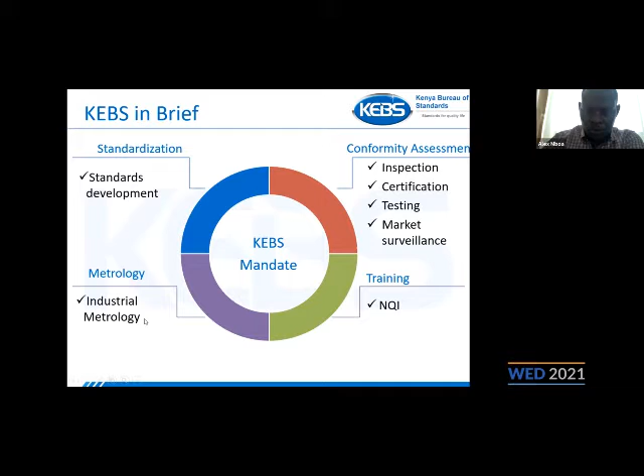So some of you, especially those dealing with measurement equipment, are aware of the importance of having your equipment calibrated. So we offer those services as well.

What is a standard? Generally, you can define a standard as a specification or guideline that outlines the safety or performance requirements for products, processes, or services.

It's normally developed and encompasses the following principles: the principle of openness, whereby participation in the process of developing a standard is open to all stakeholders interested in the aspect being standardized. We also have the principle of transparency, in that we inform stakeholders of the need and the standards we are developing. So the process is open, and in case you want information regarding development of a particular standard, you can get that information.

The standards development process is also based on consensus. Consensus means that when stakeholders come together, as KEBS we normally give them a platform to discuss the technical details of a standard. We prefer that there is consensus, meaning agreement. We build consensus within the committee, not necessarily unanimity, but consensus can be defined as where there is no sustained technical objection to a particular element or clause of the standard.

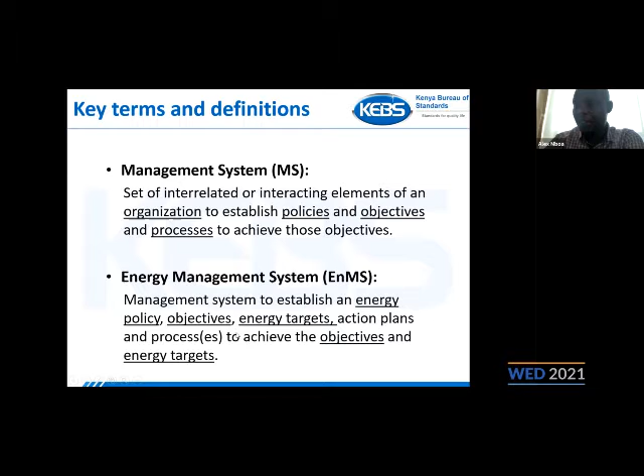The development of ISO 50001, the document was developed by ISO, the International Organization for Standardization. ISO standards are also based on consensus, and they are normally developed through technical committees, or in some cases where there is no technical committee existing, they have project committees.

ISO TC 301, Energy Management and Energy Savings, is the TC responsible for developing and maintaining ISO 50001. Currently this is the 2nd edition, which replaced the first edition, which was the 2011 edition.

And the 2nd edition adopts what we call a high-level structure, which is recommended for all the management standards. So the rationale for having a similar structure for all management system standards is that it helps organizations in having an integrated management system.

For example, if you already have an environmental management system in place, you can integrate it with an energy management system, or you can integrate an ENMS with a QMS already, if the structure is the same.

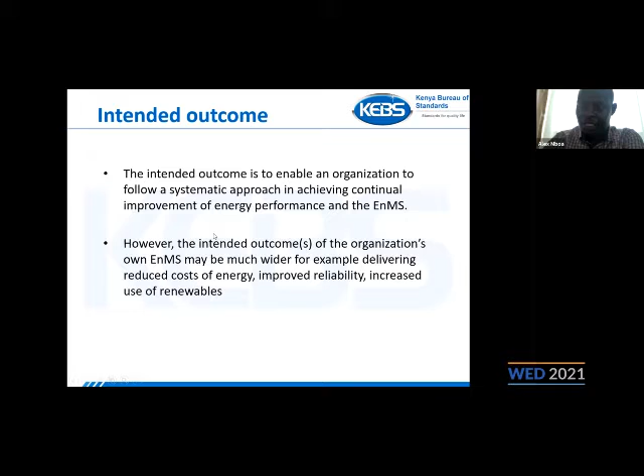Sometimes the organization can have a wider outcome than the one given above. For example, your outcome might not be energy performance improvement, or you might be concerned about energy costs, improved reliability, and increased use of renewables within your facility. So those are some of the other intended outcomes of implementing an ISO 50001 based energy management system.

Why implement an energy management system? So the first thing that comes to mind is, I think for those who have been conducting energy audits with the organization, there is what we call institutional memory.

Sometimes when you are doing energy management in an ad hoc manner, you find that the energy champion maybe leaves the organization, moves to another place. So if you didn't have a system in place, you'll have a problem because all the institutional memory is gone, and you need to start again from a clean slate.

If you had an energy management system in place, you can survive a key member of your energy team leaving your organization because the systems are already in place. All that remains is training the new employee on how to go about doing things.

The standards allow you to have a systematic approach to energy management, whereby the key aspect is that you are able to improve your energy performance in terms of consumption and related use. You can also reduce your energy cost, meet your climate change goals, have improved reliability, and increase the use of renewable energy in your premises.

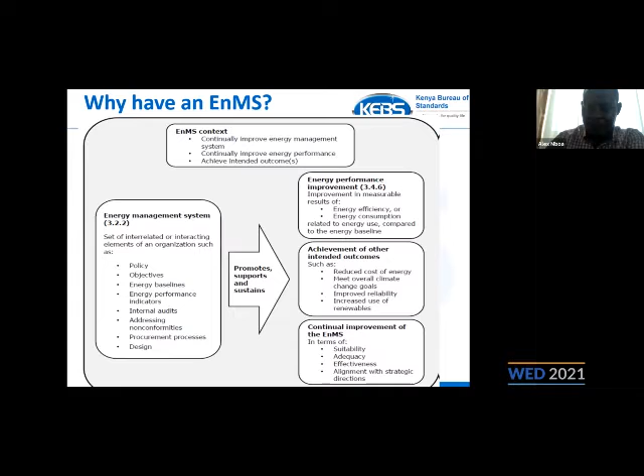The scope of the standard, ISO 50001, is actually applicable to all types of organization. How is that so? Because it allows you, the organization, to set your own targets and objectives, and then put in place measures. So the system you put in place has to be commensurate to the size and the resources that you have. The key thing is that you have to show continuous improvement in your energy performance and also the performance of the energy management system.

The other aspect is that the document can be used as a standalone document. It can also be integrated with other management systems. For example, if you already have an environmental management system in place, then it's easier for you to integrate the document within the other management system standards as well.

The rationale here is that you already have people who understand internal audit processes and the management standards way of doing things. So when you bring in the energy management system as well, it becomes easier, and the process of implementation becomes a little bit shorter.

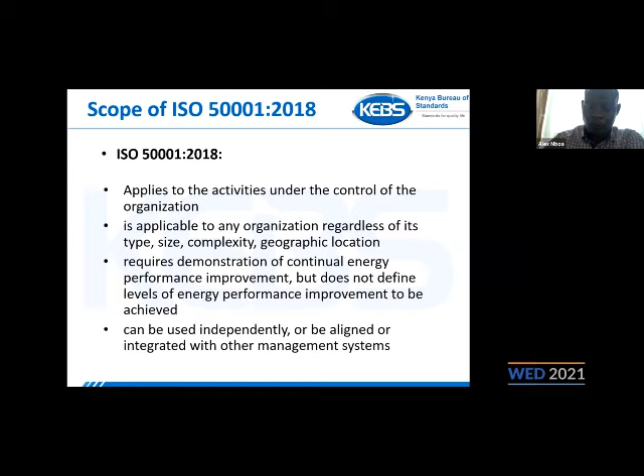The structure of the document is that ISO 50001 is based on Annex SL. Don't mind about that abbreviation - the document is actually called Annex SL, and it gives guidance on developing management system standards, providing a high-level structure for the management system standards, whereby the clauses are the same.

For example, you have a 10-clause high-level structure for each management system, even though there might be some differences here and there, which I will highlight in the next slide, between ISO 50001 and the other clauses. The rationale here is that it makes it easier to work with more than one management system if they all follow the same structure and common text in some areas as applicable.

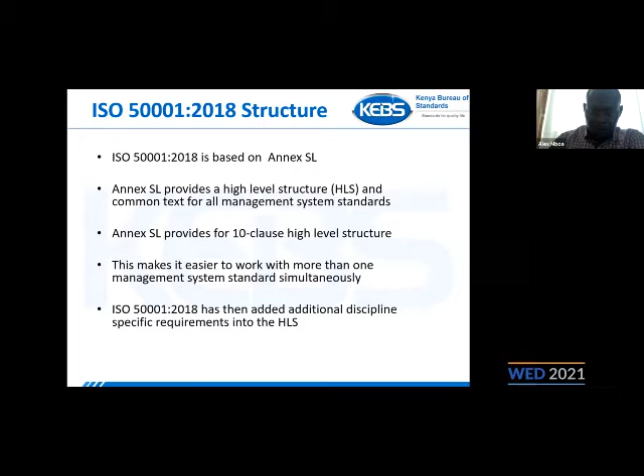The structure of ISO 50001 is highlighted here below in this diagram. Clause 4 talks about the context of the organization. The rationale here is that you're supposed to understand your organization before you start implementing an energy management system. You're supposed to understand the context of your organization, and understand the needs and expectations of your interested parties.

For example, one of the interested parties might be the regulator - what does the regulator require from your organization? Your investors might be part of the interested parties. Your employees are also part of your interested parties. So you understand their needs and also their expectations.

Once you do that, you can determine the scope of your energy management system. For example, if you have an organization with multiple facilities, does the scope of the energy management system cover all the facilities or just one facility? That's the scope - you also define the boundaries of the management system. Once you've done this, all of it is done with an understanding that there is top management support.

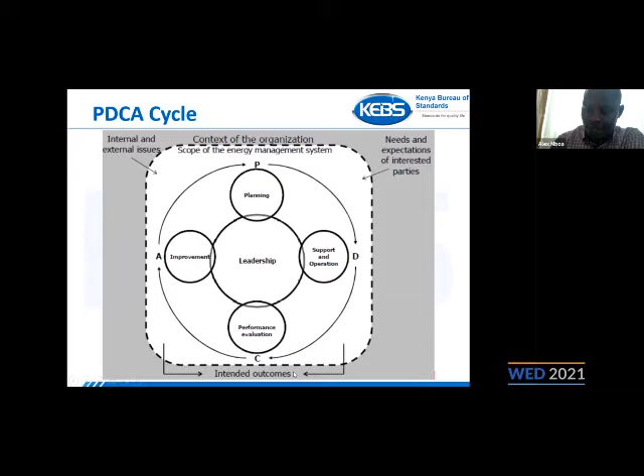So under the planning, we have to understand the context of the organization. You establish an energy policy and an energy management team. You have to address what we call the risks and opportunities. You conduct an energy review, identify significant energy uses, establish energy performance indicators, energy baselines, objectives, targets, and also develop the action plans to achieve those targets and objectives.

Under the do, this is where you implement your action plans, operation and maintenance controls, and communication. You ensure that you have developed enough competence. You also consider energy performance in design and the procurement aspect.

Under the check, that's where you're monitoring. You monitor, measure, analyze, audit, and also conduct management reviews. Act is when you are supposed to address the non-conformities and continuously improve your energy performance and the EnMS.

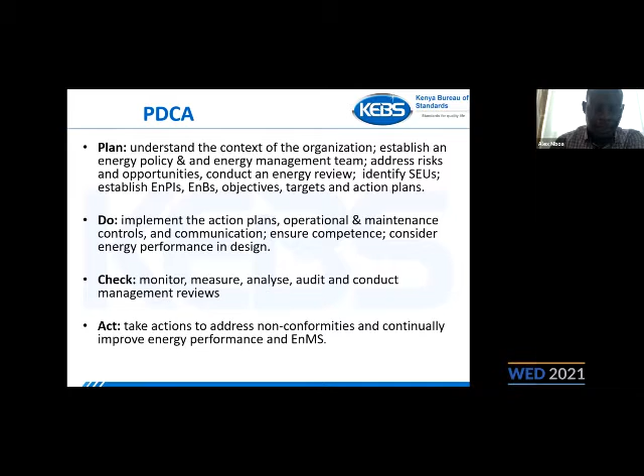The energy planning process envisioned under ISO 50001 can be viewed in two levels. First, you have the strategic view of the energy planning, then there is also the tactical view of the energy planning.

So the planning inputs under the strategic level of planning are the internal and external issues. Once you've understood the context of the organization, those are the inputs you'll have in your strategic planning. You also have the needs and expectations of interested parties. What you're expected to do under this stage is identify the risks and opportunities for your organization. Then the outputs for this exercise are normally the actions to address the risks and the opportunities.

Under tactical planning of energy, the planning input is current energy types, past and current energy uses, and past and current energy consumption. Then you conduct the planning aspect, where you conduct the energy review based on the energy consumption, then you determine your SEUs.

So you have to have a criteria for determining your significant energy uses. You might say those are the processes or equipment that consume, for example, 80% of the energy consumption in the facility. When defining the SEUs, they don't necessarily have to be the equipment or processes that consume the most energy. They can also be those processes or equipment that give you more opportunities for saving or improving your energy performance.

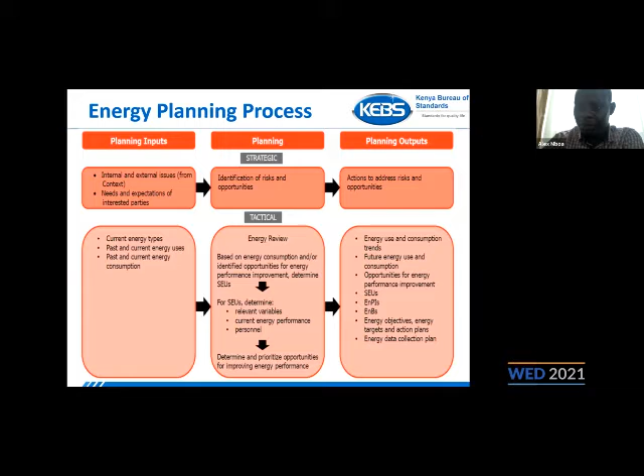The next section, we'll briefly talk about the implementation process of ISO 50001. The process can be viewed in three stages. The first stage is actually determining where we are. Then, once you have assessed where you are, you implement and operate. And then finally, you manage and improve.

So under this first stage, you are supposed to establish top management interest in establishing the energy management system. Then you also understand the requirements of the standard, legal requirements, and the expectations of interested parties and such.

Then you conduct the baseline review, develop a Gantt chart, do resource mobilization for the resources required, then approve and communicate the implementation plan that you have developed. Once you have developed that implementation plan, you are supposed to implement, monitor the project, and give the project enough resources.

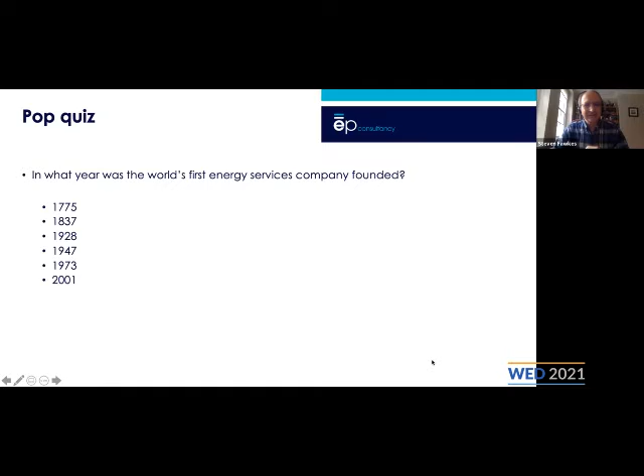The first ESCO was created in 1775 by James Watt, who of course invented a more efficient steam engine - he didn't invent the steam engine, he just made it more efficient. He and his business partner, Matthew Boulton, created an energy service company in England in 1775, and they provided these efficient steam engines to pump water out of mines.

And the way they got paid was they took a share of the savings in coal. So it just shows, you know, there's very few new ideas. And when people talk about ESCOs, their first one was in 1775.

So just 200 years after that, ESCOs started to come to the fore and be talked about, obviously in 1973, and then again in 1979, we had the oil crisis, and that really started talking about energy conservation, as we called it then. And from that point on, in the 70s and 80s, there was a growth of the ESCO industry.

Here in the UK, for instance, had BP and Shell create energy service companies. And so when you see these big oil companies suddenly saying, oh, we're into green and renewables, they tend to go through waves - in the 70s and 80s, and then they divested later on.

In the 90s, you had a lot of utilities entering the market, particularly in the US and Europe. And you also had USAID, which was extremely good at promoting the ESCO idea around the world, as well as energy performance contracts. And so in nearly all parts of the world, there are people who got trained by USAID originally and then created ESCOs, and many of those ESCOs are still small, and most of them have never really achieved the potential that they could.

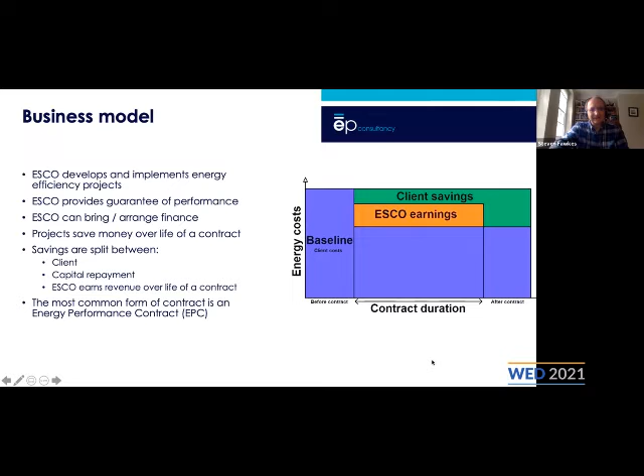And what's important to understand and remember, putting China on one side for the moment, where there are a lot of single purpose industrially focused ESCOs, 90% of the revenue in European and US ESCOs are in the public sector. And one of the phrases, pieces of jargon that you hear a lot talking of ESCOs, particularly in the US context, is the MUSH market, which is municipalities, universities, schools, and hospitals. But most ESCO activity is in the MUSH market.

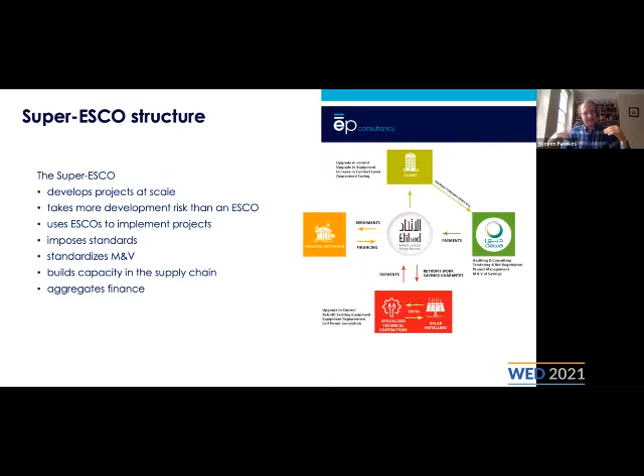This is one of the real issues when we talk about energy efficiency financing - the projects are very small compared to the amount of capital that institutional capital likes to deploy. Energy efficiency projects in the few millions to the tens of millions would be a very big energy efficiency project, whereas an investor or a fund needs to invest hundreds of millions. So this super ESCO can act as an aggregator of projects and arrange large quantities of finance.

And I suppose the first and most famous example is Super Etihad in the UAE, which, as I always say, it's rather surprising that the UAE is teaching us about energy efficiency when you look at their energy consumption, but they really have pioneered this model with the help of Regional Bank and others, and are doing some really, really good work.

They're working with clients who have buildings, so they're contracting to carry out this kind of work across whole portfolios of buildings. They're taking much more development risk, and they're really driving standards and building capacity in the supply chain - doing many of the things that address the problems with conventional ESCOs. So again, really worth reading up on what Etihad is doing and has done.

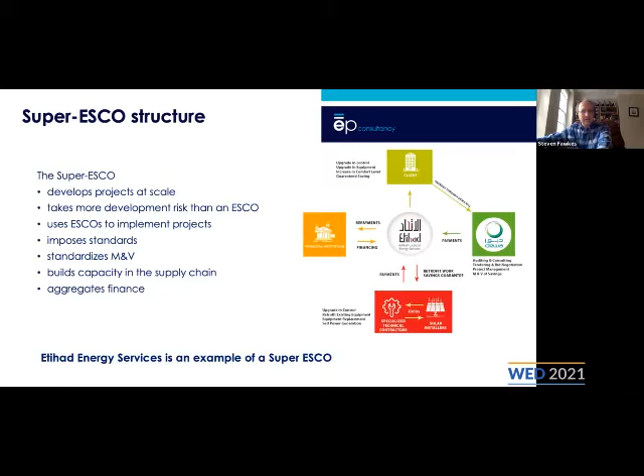So there are varieties of Super ESCOs, a bit like service contracts - there's not just one type. You have the Etihad model, which is a Super ESCO that has to be owned by DEWA, the Electricity and Water Authority. It uses performance contracts, despite all the problems I've mentioned about EPCs. It uses local ESCOs and really focuses on big portfolios of buildings.

The newer one, now up and running, is in Saudi Arabia, modeled quite a lot on the Etihad one. It was set up with World Bank assistance and is owned by the Public Investment Fund. Again, it's using EPCs and local ESCOs, but it's really focused on the government estate, which in Saudi Arabia is large. It's always hard to get much information about what's going on there, but it is up and running and implementing projects.

The two best examples, or the first examples, of Super ESCOs are from the UAE and Saudi Arabia - countries not formally known for their energy efficiency capability.

Another variety of Super ESCO is EESL in India. We have a partnership with EESL here, but EESL operates in a completely different way to Etihad and Tarshid. It aggregates demand, so it works with local governments and industrial sectors, collecting all the demand for projects and putting them together to implement them. It does not use energy performance contracts, it doesn't even use measurement and verification, but it is very good at implementing projects at scale, and it's publicly owned.

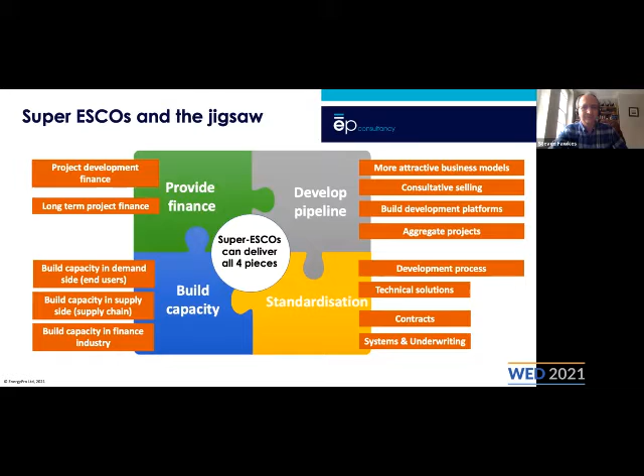If we go back to my 5 examples of super ESCOs, Etihad, Tarshid, EESL, SPL OSER, and CEF, as we call it, they've all got different models, different ownership structures. They operate in different sectors and have different financial sources, but they all deliver these 4 pieces of the jigsaw in different ways. And I think that's really important when you're thinking about, either as a policymaker or as a company, how do you increase the flow of investment into energy efficiency?

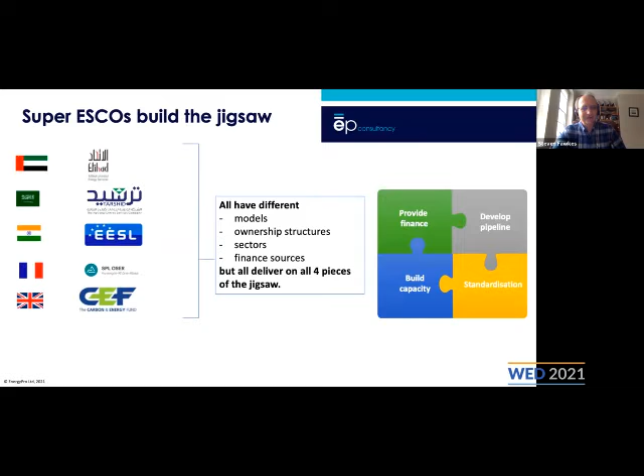So it would be remiss of me not to mention ESCO in a box. I know that some people know about ESCO in a box, this is a thing that we developed. I said earlier that one of the problems of conventional ESCOs is they cannot possibly work with SMEs. The contracts are too complicated, the projects are too small, and the UK government had a competition to come up with new business models for how to address that problem.

And we came up with ESCO in a box in partnership with Oxford Low Carbon Hub and Oxford Brookes, funded by BEIS, and with Chris Mabori at Innovators and Trevor from EnSo Impact and funding from GIZ, we're now deploying it in Kenya.

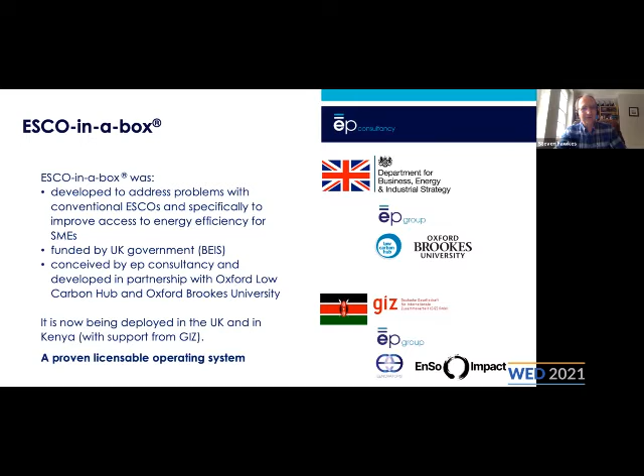So this is an alternative model, originally designed for SMEs, and it's a licensable operating system, which is why we call it ESCO in a box. If you buy the license, you get the box, and everything you need is in the box. The box contains a startup package, a marketing package, standard contracts, partner support, an operation package, and links to sources of finance. I'm sure if you want to know more, we'll be happy to provide information, or Chris Mabori can talk to you about it as well. So that's ESCO in a box.

And it really is a way, what we're finding here in the UK, and I think elsewhere in the world, it's the way of building energy efficiency capacity, which we need, but it's also more and more being seen as an economic development tool in some regions, where people recognize the kind of economic development pathway has to include ramping up investment into energy efficiency.

Where do ESCOs fit into everything? As I said earlier, what we're trying to do is increase the flow of investment into energy efficiency. That is the central problem we're all working on. There's this massive pool of potential projects - you can go into any building, any industry, and find projects. I almost guarantee anybody on this call can do that. But what we don't have is turning that potential into real projects that get invested in, whether by the company or by somebody else. It's just the amount of investment that we care about.

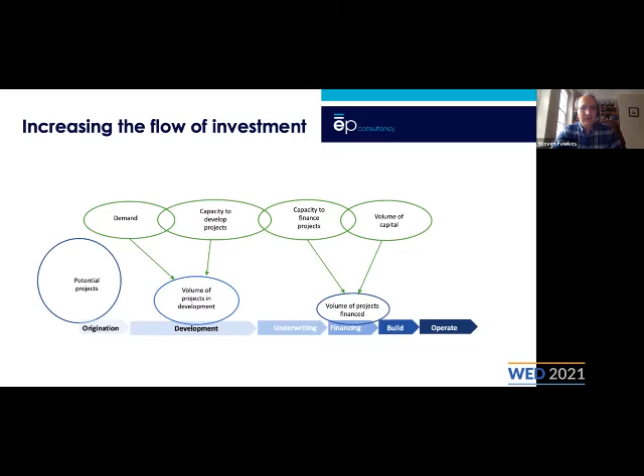I think ESCOs are primarily around the capacity to develop projects. They can influence demand because they can go out and sell. They can influence the capacity to finance because they're interacting with finance. So they're sort of bridging that development with a bit of finance and a bit of demand building.

I think if we think about super ESCOs, they can become much more involved in building demand, particularly when they're selling to large portfolios and taking on more of this early stage development risk. And they can get very much involved in building capacity to finance projects because they're interacting with institutional investors and presenting opportunities to deploy large amounts of capital rather than small amounts. So they can help build that capacity.

And then on top of that, you get this idea of dedicated financial sources or financing instruments - things like dedicated funds or dedicated credit lines, or other sources of money saying we definitely want to invest in energy efficiency. That can influence demand, because if people know the money is there, they will go out and develop projects. It can help build capacity to develop projects, capacity to finance projects, and build the volume of capital. So I think that kind of spreads - ESCOs cover one part of this problem, super ESCOs a bit more, and then financial sources cover more of the problem. It's really important to link those together when we're designing policies and programs to increase investment into energy efficiency.

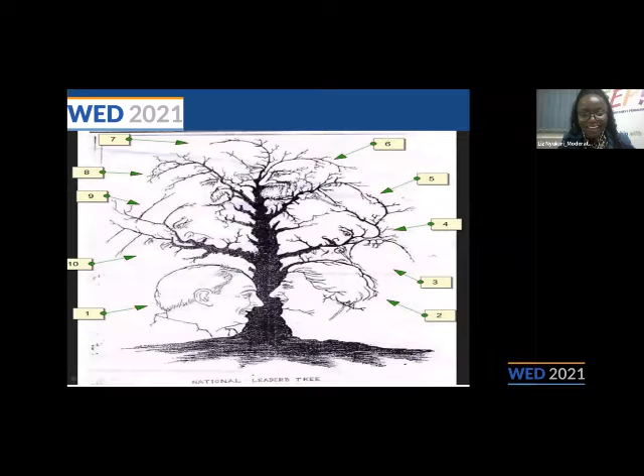It's excellent for those with 8 and 9. Thank you for that challenge. Thank you, Emily, and thank you to the audience for participating in this one.

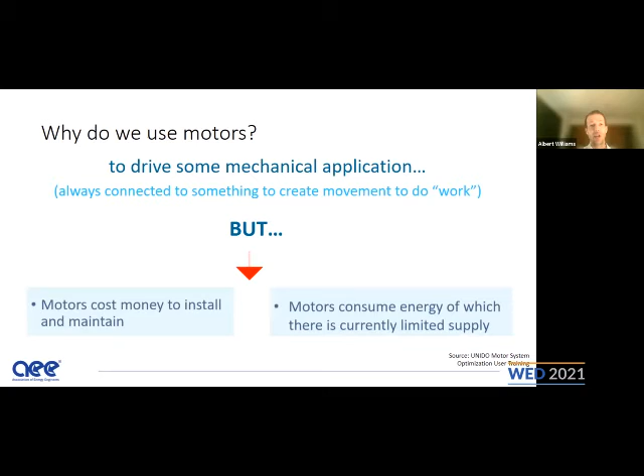So let's start at the basics. Why do we use motors? A motor on its own cannot exist - if I have a motor and switch it on, nothing is going to happen. I have to connect a load to this motor, like a pump, a fan, a compressor, or a conveyor, for me to get some work out of my system. So motors cost money to install and to maintain - that's quite expensive, and I'll show you the life cycle cost of motors just now, how expensive it is to operate a motor over a 10 or 20 year life cycle. So we really have to look at how we are consuming energy in motor systems.

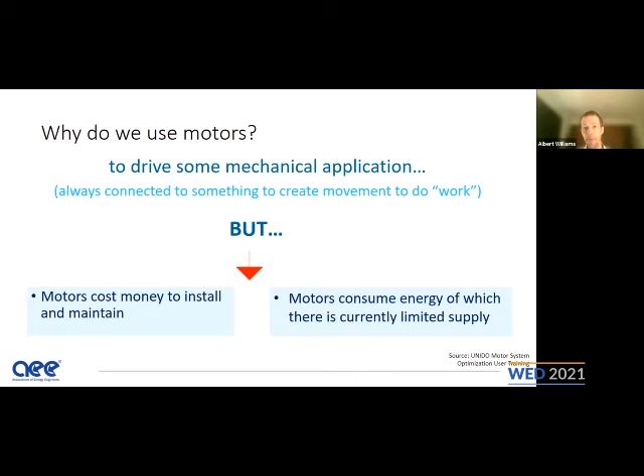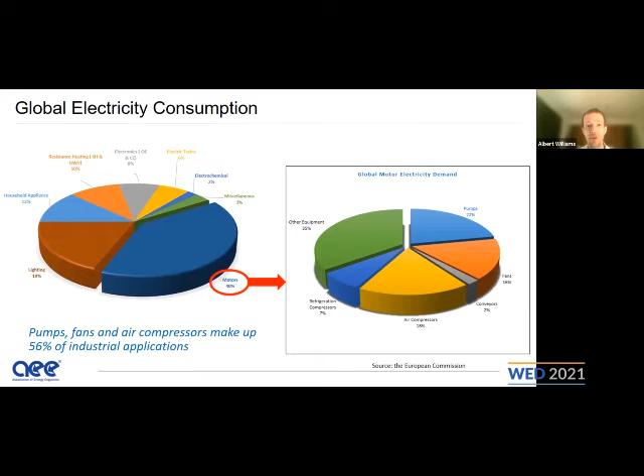Just giving you a little bit of a global perspective, motors consume a lot of energy. If you look at industry alone, two-thirds, or 67%, of all industrial energy goes to motors. But if you look at global electricity consumption, 46% of that goes to driving motors. If you take that 46% and break it down into the loads we are driving - pumps, fans, compressors, conveyors - we're sitting with about 22% for pumps and 18% for compressors. That's the breakdown of the applications the motor is driving.

I did some research on the IEA website. They publish, every now and then, some new information - a very nice source. The IEA said our total energy supply globally is 166,000 terawatt hours.

You can go through those numbers. The global electricity consumption is 24,000, and industry sits at 10,000 terawatt hours, about 40-42% of that. Motors consume two-thirds of that, so we're sitting with 7,000 terawatt hours. Compressors consume 18%, fans 18%, and pumps consume 22%.

Looking at the average electricity tariff, we have 150 billion euros per year going to pumps. That's a lot of money being used to drive pumps, compressors, fans, and conveyors.

The IEA also did a study, and they said if you go into the average industrial facility, you can save 26%. So in any industry, 26% of energy is available to be saved at an economically attractive rate of return. That represents 39 billion euros per year.

So there's a lot of money available, there's a lot of work. This last week in Egypt, we've been traveling throughout the country, going to different facilities, and I can assure you there's lots of energy being wasted. Even companies that are ISO certified with a very clean record - if you look below the carpet, you see a lot of dust and wastage everywhere. So there's plenty of work for us as energy efficiency engineers to do. The work will never dry up.

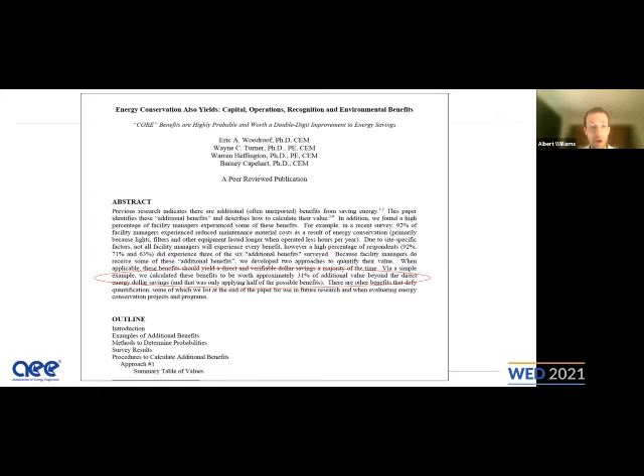There's another paper that says you can save 31% in addition to the energy savings. So it's not only about energy savings, but we improve productivity and reduce maintenance. Some of these soft topics also have a 31% additional saving beyond the pure energy savings. So I hope you agree that energy efficiency is really attractive from a financial standpoint. Some of the previous speakers have also talked about the financial aspects.

This is just an example of a compressor versus a normal vehicle that you purchase. If you look at the 5-year life cycle cost, where does your money go for 5 years? For a compressor, 88% of your life cycle cost goes to the electricity cost of that compressor. The purchase price is relatively small. Compare that to a vehicle, where the energy cost is actually quite low compared to the purchase price.

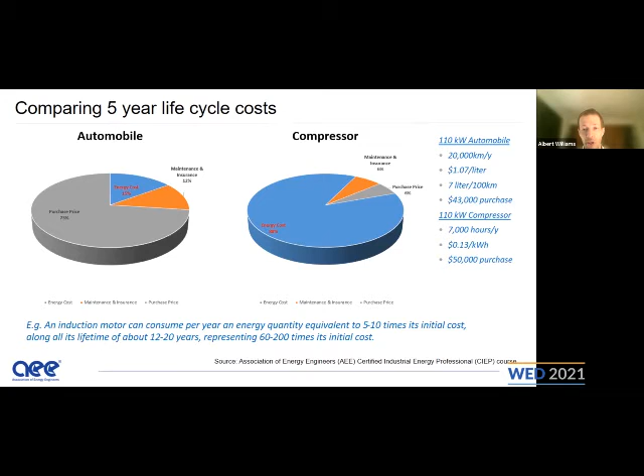Look at this statement at the bottom, which is very interesting: an induction motor can consume per year an energy quantity equivalent to 5 to 10 times its initial cost, and along its lifetime of 12 to 20 years, that represents 60 to 200 times its initial cost. So ladies and gentlemen, you can agree with me that it's worth spending a little bit more on your motor, as the energy cost will be 60 to 200 times the original procurement cost.

When we look at motors and motor systems, we take the systems approach. We're not only looking at the motor or the component - as I've said, the motor cannot exist on its own. We have to look at the drive, the pump, and the entire system.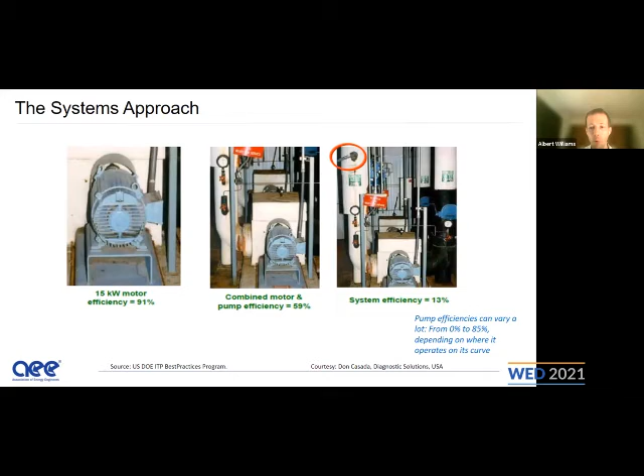So if we only look at motors and only think about improving the motor to a higher efficiency class, we are actually missing most of the savings. That's why we take the systems approach - we look at the pipes, the valves, the control mechanisms, how the water, air, or steam is being used, rather than only looking at the motor.

So what have I essentially done here? I have gotten the same output, but the input power has been massively reduced. So what I've created here is a virtual power station.

Now you can spend a lot of millions or billions of South African rands that we have been doing to build some power stations, or you can create these virtual power stations. So these virtual power stations, we are creating energy to have energy security in the country, and we can now improve the economy and use the energy elsewhere to grow the economy.

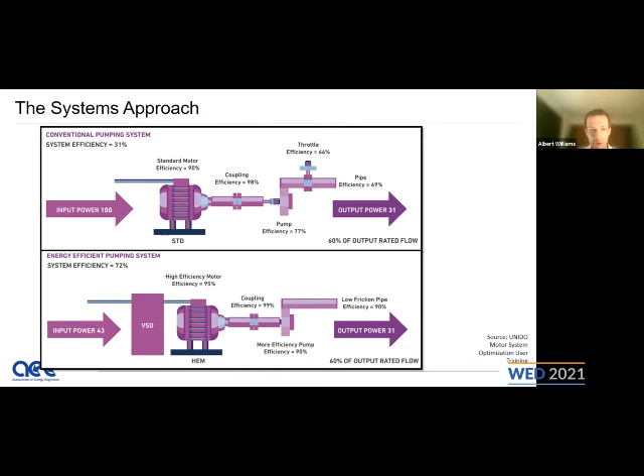As we know, in Africa there's a decoupling between energy efficiency and economic growth. We cannot reduce energy at the same rate at the expense of the economy as some of the first world countries can do. So that's a very cheap way to create energy or to create a power station.

Right, so we are looking at the systems approach. If I look at the systems approach, I can save anywhere between 5 and 40%. If I only look at the motor, maybe 1 or 4% can be saved.

So I have to start at the load requirement first. First, look at the valves, the pipes, the pump, the fan. And then after you've optimized that, then you go to the motor.

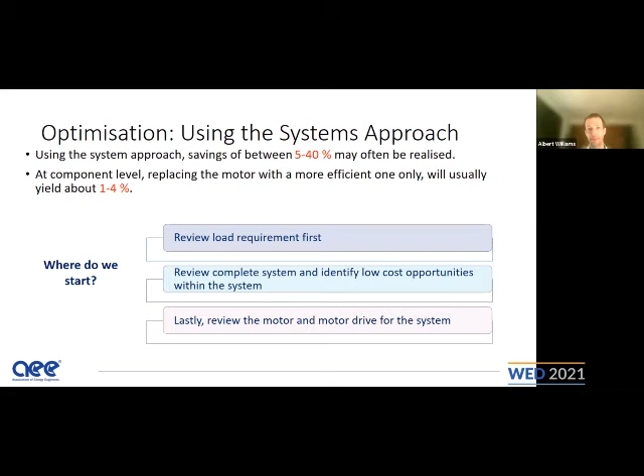Okay, but most of you, or some of you, may be aware of all of these things if you've done some of the CEM or CEA training courses. So let's go a little bit more into the details of motors, electric motors.

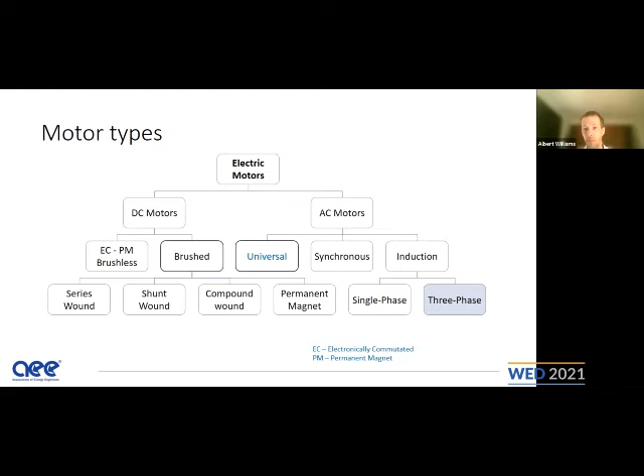So we get 2 classes. I'm not going to go too technical or in too much detail here, but we have direct current motors and alternating current motors. On the alternating current side, we've got induction, 3-phase induction motors. Those ones are the most common and by far the most popular ones. Then you get synchronous as well. And on the DC motors, some of the new and emerging technologies is the electronically commutated permanent magnet motors. And I'll show you some things on these technologies.

So firstly, we've got this 3-phase induction motor used in more than 90% of electric motor systems. We've got very good reliability. It's low cost relatively, the maintenance is quite easy, it's easy to control. So these ones are very popular and you'll see them everywhere in industry.

Then we have these permanent magnet synchronous motors, or PMSM. They are also called electronically commutated motors or brushless motors. So the advantage of these types of motors is that they do not have brushes. Now, brushes is one of the components that wears out the fastest and has a very high maintenance cost and replacement cost. So we've got this advantage of no brushes in these permanent magnet types of motors.

The other advantage is that we've got synchronous operation. Okay, so if you're familiar with motors, you know that the rotor is rotating at a slower speed than the magnetic field that's being created. So with these types of motors, the rotor is rotating at the same speed. So that's just some technical background.

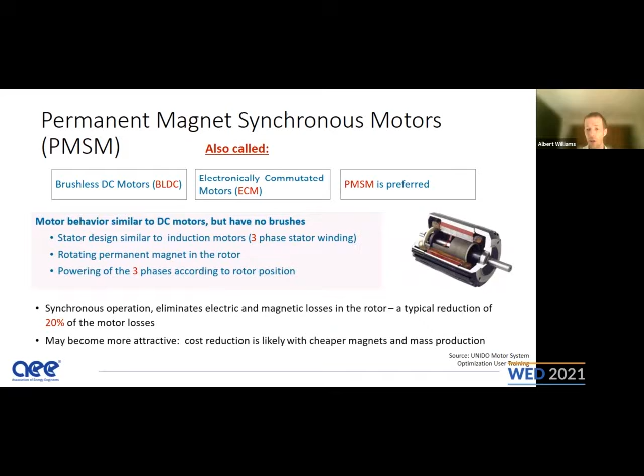The thing that we have to focus on here is that there's 20% less motor losses. Not the improvement in efficiency, but the motor losses is reduced by 20%. So these motors are becoming very attractive. At this stage, they are quite relatively expensive, but as we go into mass production, especially with electric vehicles, the cost for these types of motors will come down. And as the magnet cost is also coming down, these things are going to become more popular.

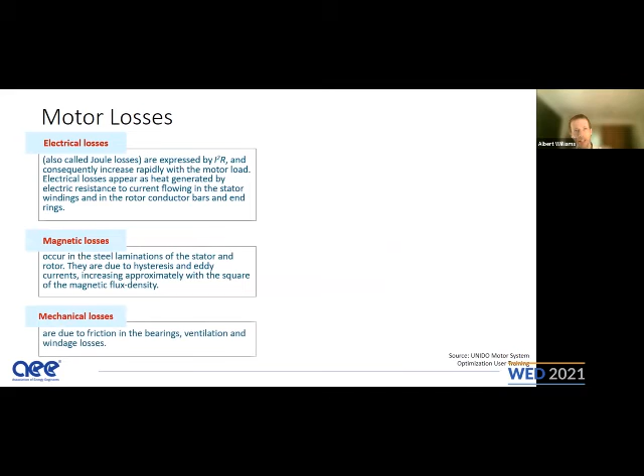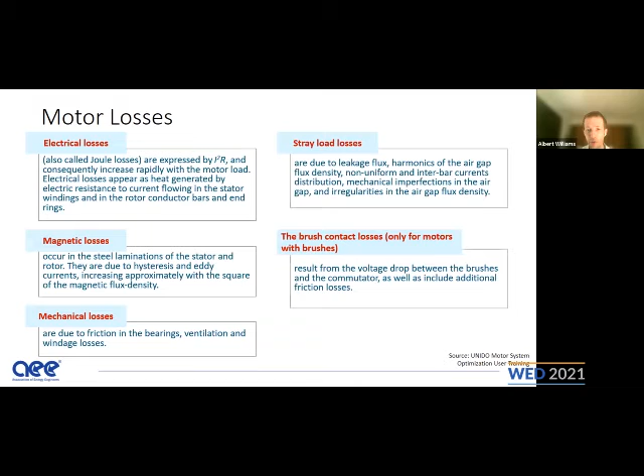So if I talk about the motor losses, what types of losses do we talk about? I'm not going to go into detail, but basically you've got electrical, magnetic, and mechanical losses, and there are different kinds of definitions. You can have this training material afterwards and go through some of these losses that you find in motors.

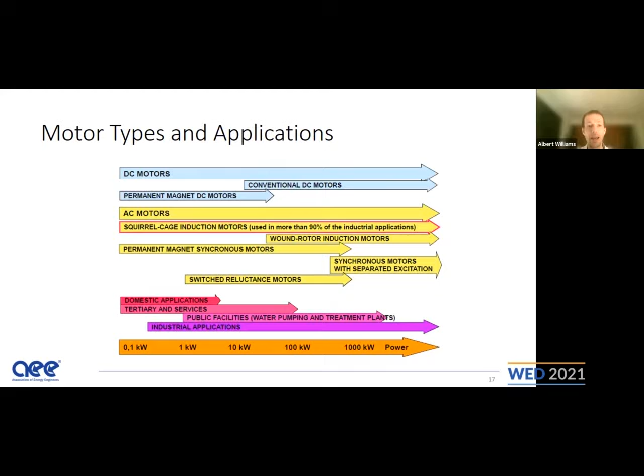Here's just an overview. I'm just giving you a little bit of a concept of where the different kinds of motors are being used, for what types of sizes they are being used for. The induction motor is the most common one for a wide range of different sizes.

So the failures in motors, one of the biggest failures is because of bearings. And bearings can fail due to, firstly, overheating. Overheating is one of the largest problems in motors. If you increase the temperature of a motor a little bit more than its capacity, the motor lifetime is going to reduce quite rapidly. Other things are insulation breakdown, mechanical breakage, and electric faults.

So just to come back to that temperature, on your nameplate you will have a different insulation class. Normally a class F is quite a common type of motor, and this gives you an operating temperature of 155 degrees Celsius. So if you operate your motor at 165 degrees Celsius, you will reduce your lifetime by 50%. So temperature is extremely important to improve your insulation lifetime and also your bearing lifetime.

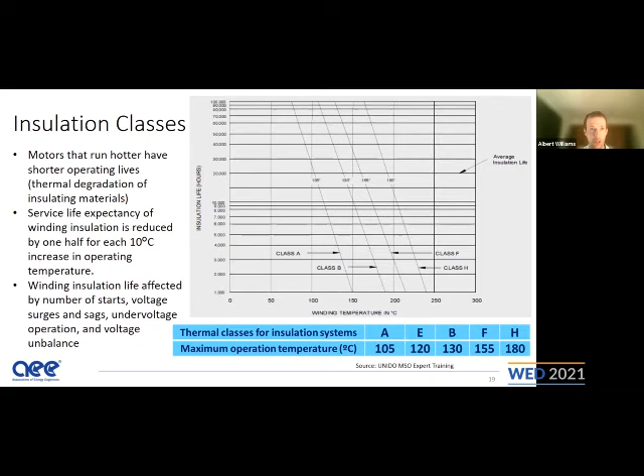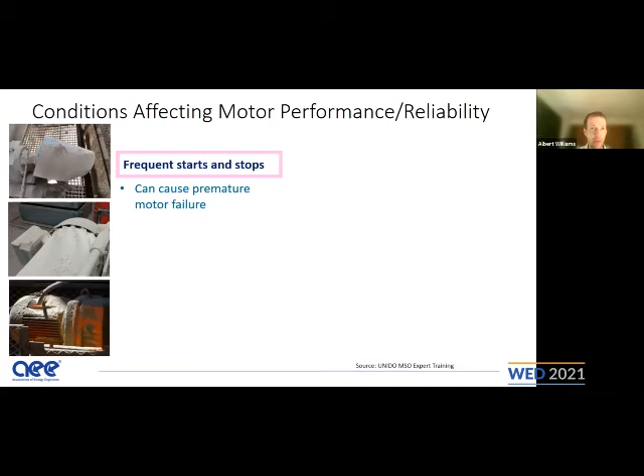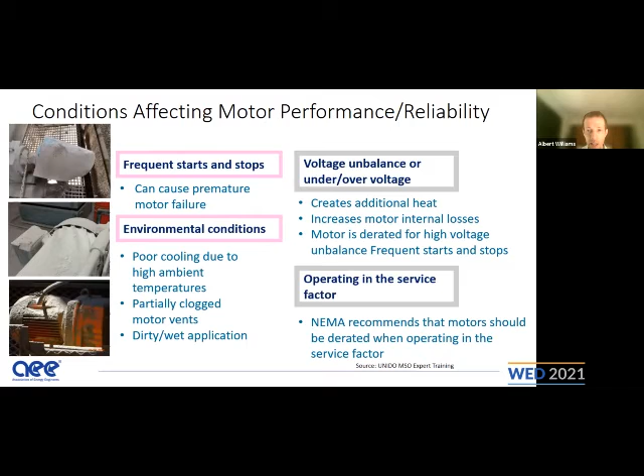So the moral of the story is use the correct motor for the correct application based on the conditions. Other things that influence motors are frequent starts and stops, because that increases the temperature, voltage unbalances, environmental conditions, and operating the motor harder than it can handle. If you operate it at a higher kilowatts than it's designed for, you are going to reduce the lifetime.

Okay, so the topic of this conversation I'm having with you today is to look a little bit at the motor efficiency classes, IE1 to IE5. These are the international energy efficiency standards that have now been accepted worldwide. Previously, they had the EFF 2 and 1, but these have now been overruled to these IE1, 2, and 3 efficiency classes, and I'll give you some more information on that. So that's a big saving.

You also get an IE0 motor. For instance, in China, they will manufacture IE0 motors and sell them to Africa, because in China it's illegal to have anything less than an IE2 motor. So we have to be careful for the types of motors that we procure.

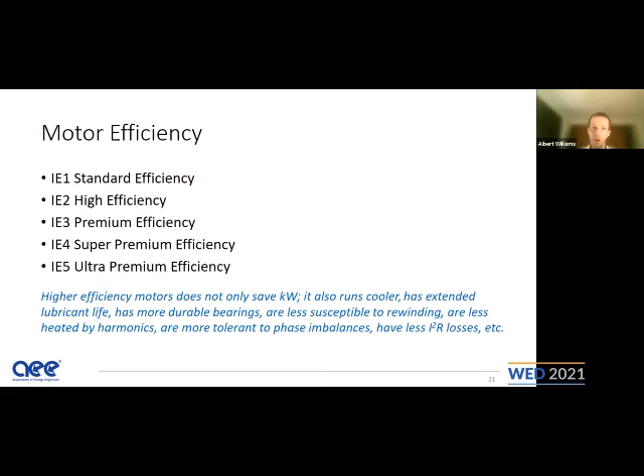So what is the efficiency, or what is the benefit of these high efficiency motors? I've listed some of the advantages here. Firstly, it runs at a cooler temperature. It has an extended lubricant life. The bearings are better. We are less susceptible to rewinding. It's less influenced by power quality problems and harmonic problems. Phase imbalances is less as well. And we have less I squared R losses, which is basically the heat losses. So there's not only an energy saving going from an IE1 to an IE4 motor, for instance, there's also all of these maintenance savings. And that's why we really emphasize spending a little bit more money in purchasing the higher efficiency classes.

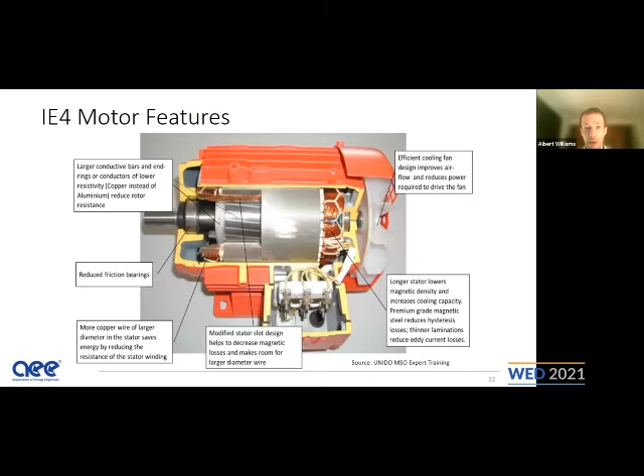There's just an overview of what are some of the manufacturing aspects in designing or building some of these high efficiency class motors. You can have a look at that at a later stage.

There's an IE5 as well, which is your ultra efficiency motor. Now, these things are not really commercially available, it's more of a concept at this stage. As the technology is improving, these things will be rolled out and be more available. So it's only presented at this stage as an informative annex, Annex A in this IEC standard. So the goal of an IE5 motor is to reduce the losses by 20% relative to IE4.

So, and that's the difference. I'll show you a little bit later, but all of the efficiency classes basically have a 20% reduction in losses. So from IE2 to IE3, there's 20% less losses. And that's sort of the criteria for these efficiency classes. But IE4 is commercially available and easy to procure.

What are some of the differences in terms of efficiency? There are curves for motor efficiency over the range of its power, and we've got a 20% reduction in each of these classes.

Now, the efficiency classes have been standardized. The IEC is used in Europe and basically in the rest of the world. The USA uses the NEMA standards, the National Electrical Manufacturers Association. NEMA and IEC are very much integrated and are much the same at this stage, but we are using IEC classes.

So how do they determine these efficiency classes? Firstly, they have to test it at a certain torque and a certain rated speed. So at 100% torque and 100% rated speed, they do the measurements and compare the efficiency at that point, and that is how they categorize these different kinds of efficiencies.

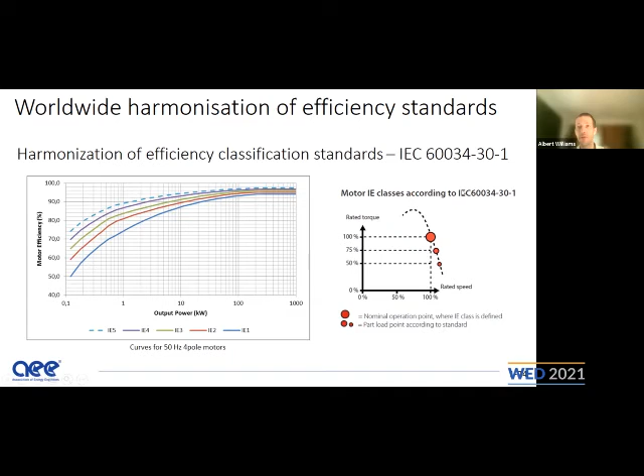Okay, so this is the IEC 60034-30-1. Now there's also another type of standard, the 61800 standard from the IEC. Now they are looking a little bit more at the bigger picture - the entire motor system. In other words, it's not only efficiency built into the motor, but the variable speed drive is also taken into consideration, so we've got the efficiency classes for the entire motor system.

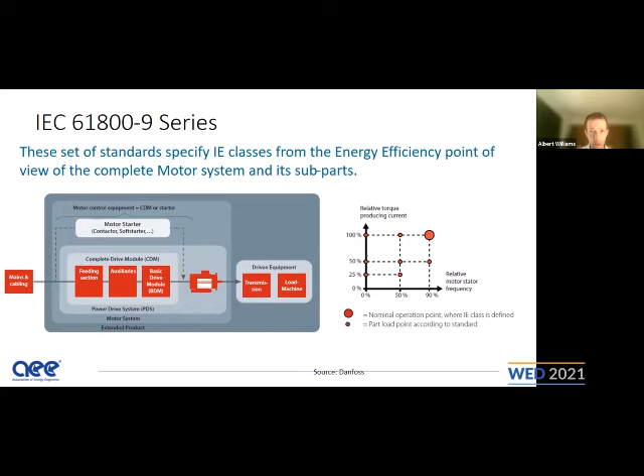Firstly, they have to take into consideration that this motor will not always run at 100%, but sometimes it will run at part load conditions. So we've got 100% torque, sometimes 50 or 25%, at different revolutions per minute of that motor. They take a cross section of different operating parameters to have a fair apples to apples comparison on these efficiency classes. So that's a very nice standard to look at because the variable speed drive is taken into consideration.

Now, if we look at induction motors in industry, we go up to IE4 class. But in the last few years, there's been a drive in electric vehicles. If you have a look at a bit of the history, especially in Europe with regards to policies, all the motor manufacturers are spending a lot of money. They are seeing that electric vehicles are the way of the future, and it's being phased in in most European countries quite soon - in a few years' time, normal vehicles will not be manufactured anymore.

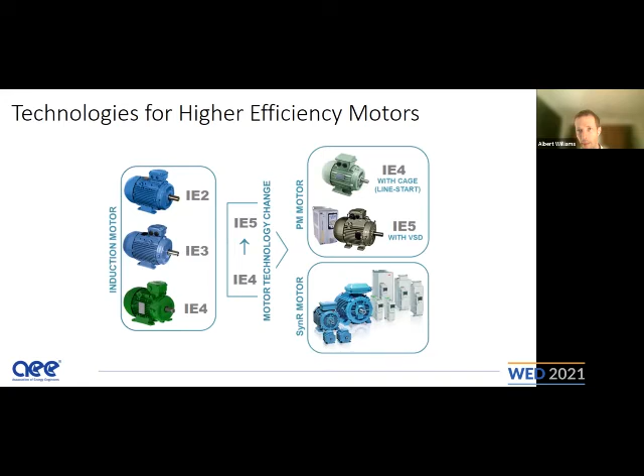So Audi, BMW, Mercedes, all of them are doing a lot of research and development to improve the efficiency of motors. So much money is being invested, and this is the first time in history that motor technology is improving with this steep learning curve, or changing at such a rapid pace. That's why the IE5 is becoming more prevalent. As this technology changes, induction motors will be phased out in the future, and we will have more permanent magnet type motors, also with variable speed drives. So quite exciting, the things happening in the electric vehicle market.

Now, I'm sure in the audience there are some policymakers or people from government who have some influence over the national policies of your respective countries. This is actually quite an important thing - the approach coming from government to determine what the efficiency standard is for different countries.

So we have the MEPS, the minimum energy performance standards, and a lot of countries, basically all the first world countries, already have this implemented. Basically, it says that you are not allowed to procure any motor of a lower efficiency - that's what is shown here. So, for instance, in 1997, the USA and Canada said that all motors shall be IE2 motors. And here's a timeline for different countries that have implemented this as well - India had it in 2017.

So this is quite important, and this is one of the biggest drivers towards improving energy efficiency from a governmental perspective. Because I'm in Egypt now, we are talking about this, and I'm more familiar with the Egyptian situation.

Egypt just last year became the first African country to adopt a MEPS standard for their motors. They have now said that all motors shall be of an IE3 efficiency class. Currently in Egypt, if you look at the top right picture, most of the motors are IE0 with very poor efficiency, and they've got IE1 and IE2 as well. But Egypt has the capability to manufacture IE3.

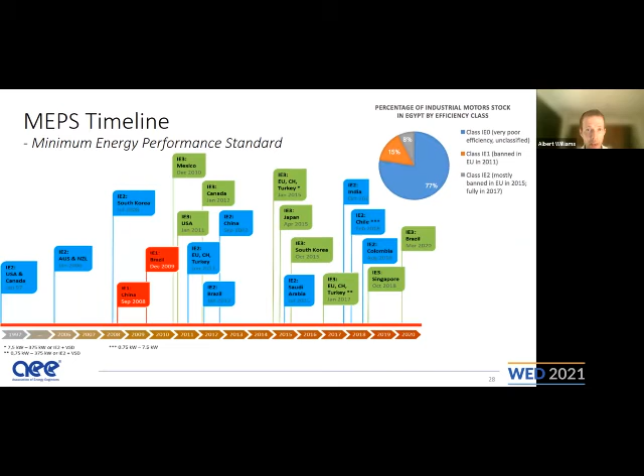So the government has said no more, we shall not import these lower class efficiency motors. Egypt is now becoming one of the leaders with regards to energy efficiency. That's really an example for the rest of Africa to follow.

Here are some of the countries that has dictated these efficiency classes, and you can see all the first world countries already have these performance class requirements in place. Look at the bottom there - just because of this policy that Egypt has adopted, they will save $560 million by the year 2030, just because of this law.

The first time I did these motor training systems was in 2014, and they said that anytime now the South African government would also adopt an IE2 minimum energy performance standard. That was 7 or 8 years ago. Still today, the South African government has not determined or signed off on this policy, and it's not yet adopted in South Africa. It's really a simple concept.

I understand there are some supply chain problems and logistical concerns, but government really has to look at this, and it will make a massive influence, because two-thirds of all energy in industry goes to motors. So if you can adopt this, you will definitely have a large improvement in your national electricity consumption. The Chinese especially are manufacturing these low quality motors and exporting them to Africa, so Africa is their market for poor quality, and Africa is sitting with the inefficiencies.

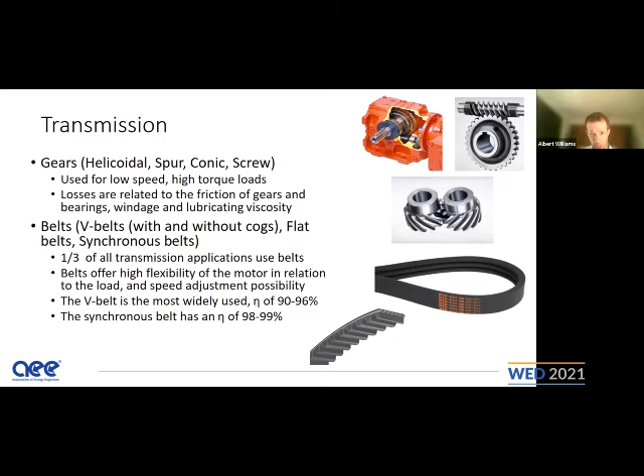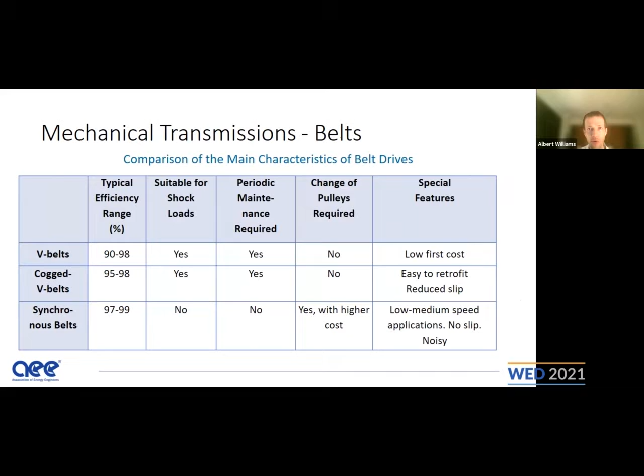Belts are more common in industry - one third of all transmission applications uses belts. You can consider, if you have for instance a V belt, converting that to a flat belt or a synchronous belt, and you can get some percentage of savings. There's a comparison showing the efficiency of V belts versus cogged V belts or synchronous belts, with efficiency savings there. Automatic tensioning of belts is also a consideration to improve your motor system - we're looking at the holistic picture.

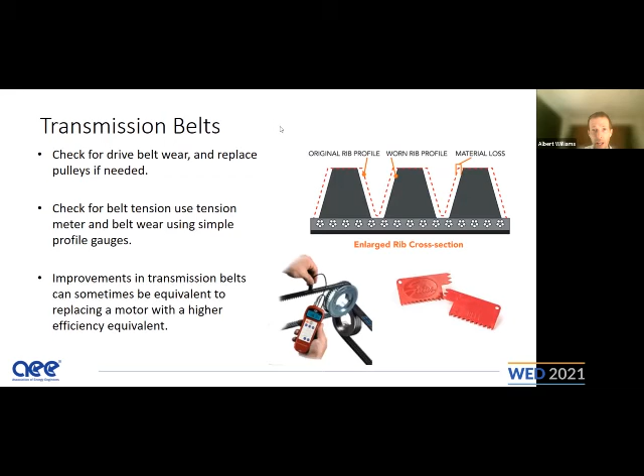Just some maintenance things - look at the belts, replace them if needed, replace the pulleys if needed. Look at the belt tensioning, have automatic tensioning if possible, and you can get some savings. Don't forget about belts - we always talk about motors, pumps and compressors, but sometimes the belts are forgotten about.

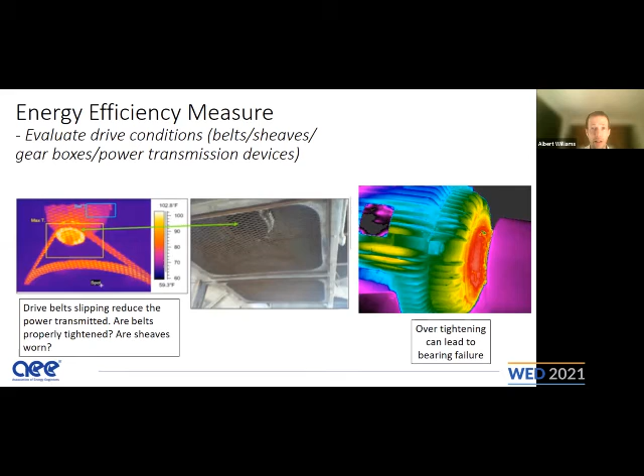On the right-hand side we've got some temperatures on the bearing side, and that's also because of misalignment - it can be because of vibration. The bearings are starting to fail, and those excessive temperatures indicate that the motor is about to fail and needs urgent maintenance. Right, some new technologies - other things to think about if you are having electric motors is regeneration.

If you have a motor, hoist, or crane picking up a load, you are going to use some energy. But as soon as that load is being delivered, or as it's going in the downwards direction, we can think about regeneration. We can use a variable speed drive with an active front end, and we can basically generate electricity and feed that back into the supply network.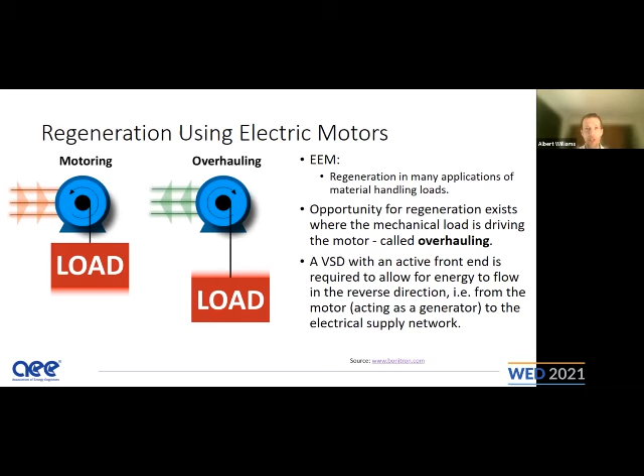That's what some of the technology in Formula One motors does, for instance, when the cars are braking. Instead of having a frictional brake, they've got this active front end brake, and they are basically generating energy to make the cars more powerful. So whenever you have some technologies like a crane or a hoist, this is something to consider.

On the right-hand side there at the shipping port, they've got this type of technology. It's basically a variable speed drive that you can regenerate some of the energy with. The mechanical brake has a lot of frictional losses, but with this dynamic brake, you can have an electric circuit that allows the energy to be dissipated through a resistor back, and we are creating energy. Very nice. Think about an application like this.

We were yesterday at a steel manufacturing facility here in the east of Egypt, next to the Suez Canal, and we saw some of these massive overhead gantry cranes that are picking up these ladles in the steelmaking industry. So yes, with installing VSDs with regenerative capabilities, you can save up to 40% of the energy consumption.

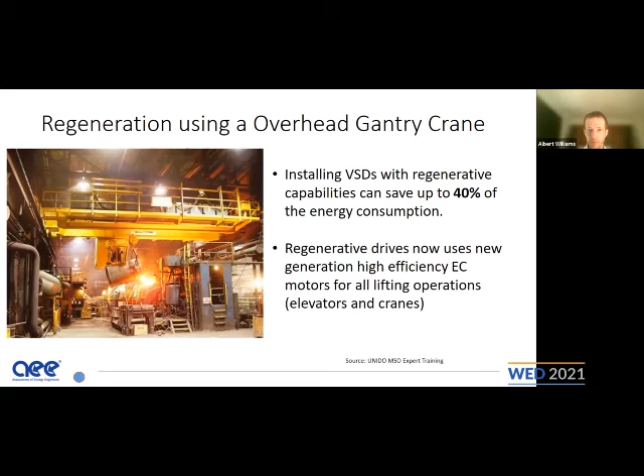Elevators as well are something to consider. Let's look a little bit at the case study. There's a retrofit, all right, we're going. This was an actual case that was done in Egypt. They went from an IE0 motor to an IE4 line start permanent magnet motor.

It is only a 5.5 kilowatt motor, so it's relatively small, a 4-pole motor. There's some information on the specifications of these motors you can have a look at. But basically, the original motor, the IE0, was oversized. It ran at a load factor of 57%. So we could have actually reduced the size of the motor as well, but the plant wasn't comfortable with that, and they kept the same size for some redundancy.

But by replacing that, only going from an induction motor to this line start magnet motor, they were able to achieve a saving of 1,500 kilowatt hours per year with a 2-year payback. So it's a very small motor. There are case studies that are more attractive than this one, but it's just a little bit of an indication of how much money you can save.

So just as one slide, what to do with your electric motors? What are some of the opportunities? First and foremost, look at the end use. Look at the pump, the fan, the compressor, the conveyor. How are you consuming this water or air? After you've done that, then you can consider right-sizing the motor, control your motor with a variable speed drive, and upgrade, if you have low efficiency classes, upgrade that to a higher efficiency.

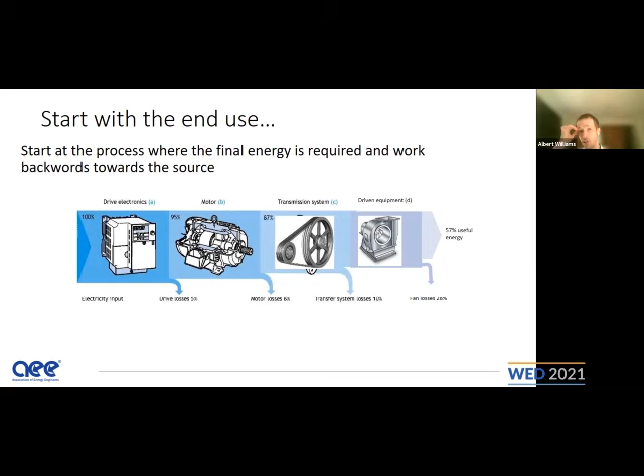All right, so that covers the motor side. Just a little bit on the load. We said we are looking at the load where energy is finally being consumed. Just a few slides on this. Once again, the big losses are in the driven equipment. A motor on its own is useless. It's only when it's driving a fan or a pump that we can get some work out, and that's where the opportunity is.

So we're not going to go into pumps and fans in detail. Basically, we've got training courses for this. The Certified Energy Manager, Certified Energy Auditor focuses a little bit more on these aspects.

Basically, your pump or your fan must be operating at its most efficient point. It must be of the right size. So you have a certain load or a certain requirement for air or for water, and the pump and the fan must be correctly sized and correctly operating to satisfy that demand. So there's a whole 5-day training course on how to do that, and we go into some software when we do these pump and fan training courses.

Control, control, control. Do not control with closed valves, through bypasses, or through closed dampers. Consider having a variable speed drive instead.

There are some limitations to that. You can't just put in a variable speed drive and expect it to work; you have to think about some aspects there. Pumps in parallel is always an opportunity. And then there's pump suction conditions, the pipe on the suction side where the water goes into the pump - oftentimes there's problems there.

I'd say that 80% of pump problems are in the piping or in the distribution, and 80% of distribution problems are at the suction, and you get cavitation as well if those conditions are not proper. We want to increase the pressure on the suction side of a pump.

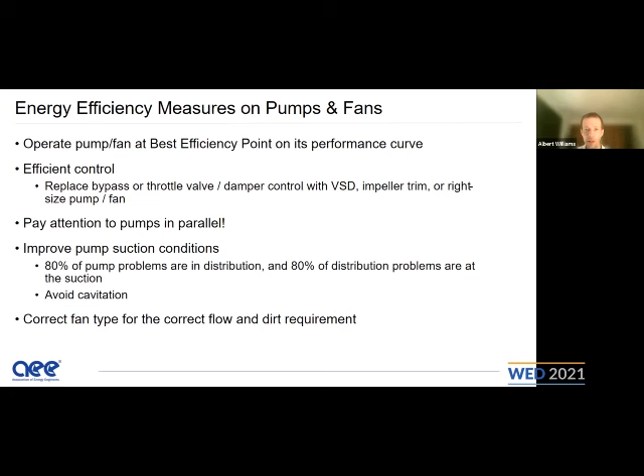And for fans as well, there's a lot of commonalities between fans and pumps. But for fans, it's quite important that you have the correct type of fan for the contaminants in the airstream, and also that you run at your best performance curves there.

So we just had some case studies. I just want to show you some of the things. I did a project in Albania on the pumps for a water utility. They've got a 300 kilowatt pump, two of those, consuming 4.6 gigawatt hours per year. And we found a lot of friction in the pump station.

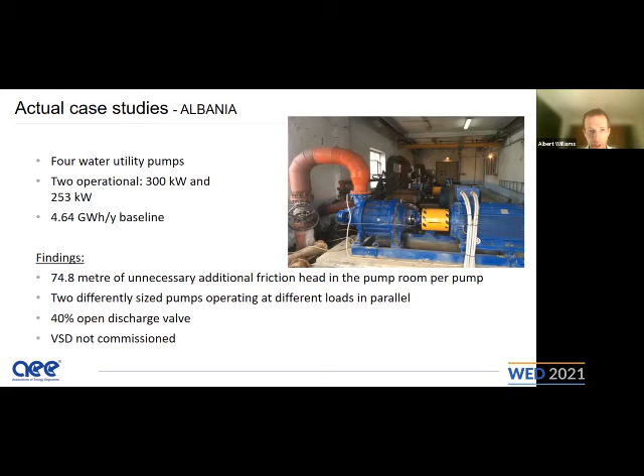One of the things we found was that the discharge valve was 40% open, 60% closed. And we found a variable speed drive on the wall there, but it had been decommissioned because no one knew how to work it. By opening up that valve, commissioning the variable speed drive, and upgrading the motor to an IE3 motor, we were able to save 240,000 dollars - a 42% saving - just by doing some simple things. Simple payback: 0.1 years.

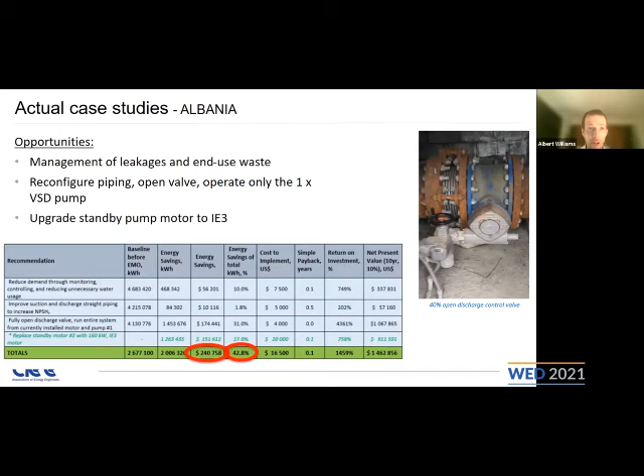On compressed air systems - this is where I do most of my work. I've personally done a study on about 60 to 70 energy systems that I've audited, and my findings were that there's 9 areas of opportunity in compressed air systems. Compressed air is very, very expensive: for every 6.7 kilowatts that goes into a compressor, only 1 kilowatt of pneumatic power comes out.

And that 1 kilowatt, 50% of that is wasted. So you're sitting with a system efficiency of 5 to 10%. Compressed air is the most expensive source of energy. So by looking at things like how your compressors are controlled, what the storage volume in your system is, looking at leakages and inappropriate uses, and looking at the pressure in the system, these things can save you quite a lot of money.

My findings were that you can save - the savings were 36%, a 36% saving in an average industrial facility at an 81% return on investment. It's extremely exciting, because it's so inefficient, a small saving - if you can stop a small leak, you get a massive saving because of compressed air being so inefficient.

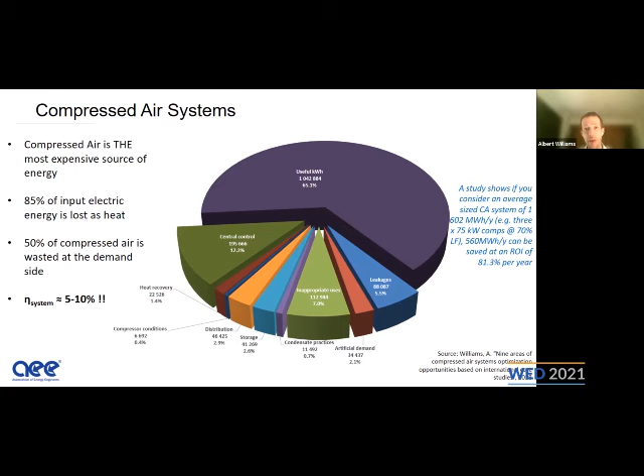Very exciting, and I've seen a lot of wastage just yesterday - we were at a textile manufacturing facility. I've got literally hundreds of these case studies. There's just one on a textile plant because I'm working in textile these days. We improved the control, improved the storage volume, and managed the leakages. It's a relatively small system, but we found a 40% saving with a payback of 9 months.

And there's a steam system as well on the same textile plant. We saved 4%, just by doing some easy things there.

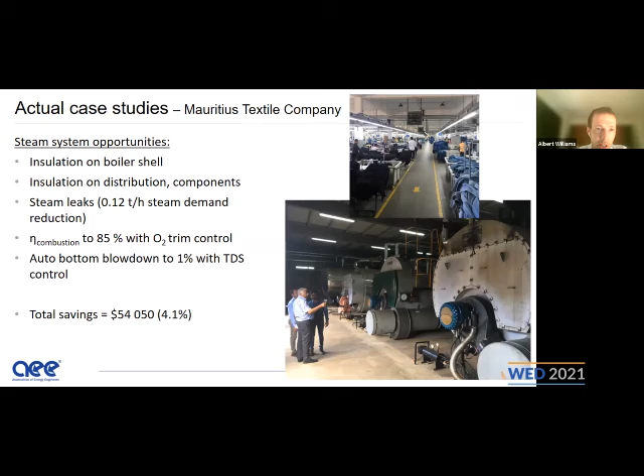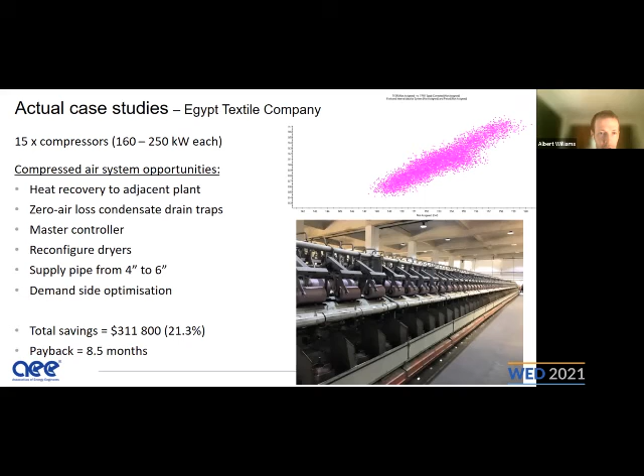All right, just some more case studies. This was an Egypt textile company, also on compressed air. We did this one in March in Egypt, and we saved 21% with an 8-month payback. So there's lots of things on compressors as well.

All right, so let's wrap up. I'm almost finished - let's look at some of the emerging technologies. Electric vehicles, very, very exciting. I've read some books and looked at some presentations and conferences. Electric vehicles are the way of the future. They are coming in rapidly, especially in Europe. These things are becoming quite prevalent.

Self-driving vehicles are also much more advanced than I thought - there's really some interesting studies and testing going on. With electric vehicles, it's quite efficient - we've got much fewer moving parts.

The maintenance is much less, and the energy conversion efficiency is much better. But it all depends on where the electricity comes from, how you charge your battery. If you charge it from coal-fired or gas-fired power stations, you negate all the savings you're making. So it's good if you can get the generation from renewable energy sources. But at the end of the day, there are much less losses in the energy path of an electric vehicle.

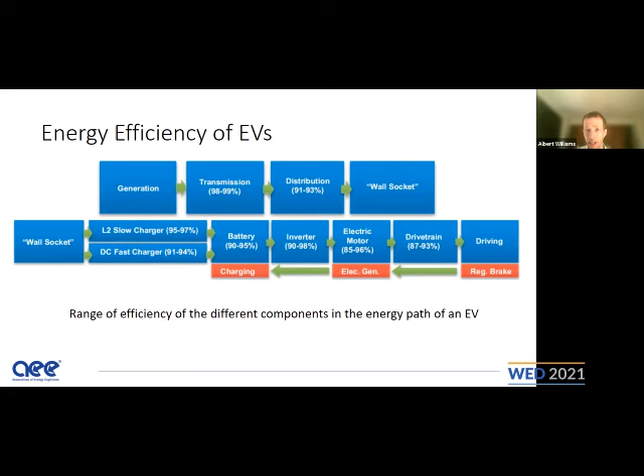And if you have regenerative braking as well, that puts back some of the energy.

And we saw some of the things happening in Uganda, right? Well done to Uganda, which has rolled out electric buses at around 245 kilowatts, able to go up to 300 kilometers on a single charge. Uganda is one of the leaders in this technology. I also saw in Alexandria, Egypt, they are doing some testing on electric buses. So Uganda is really an example for the rest of Africa in this regard.

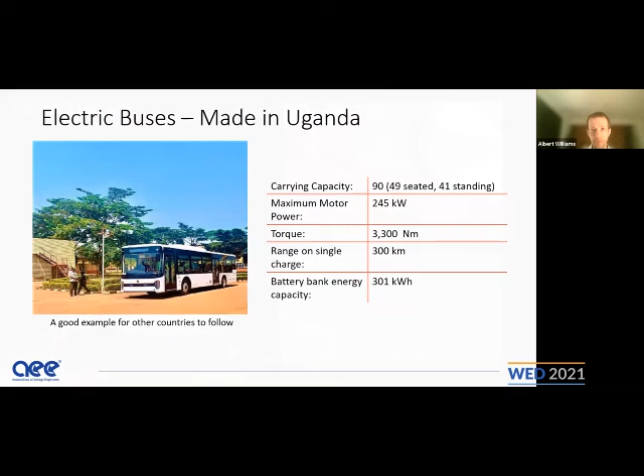All right, so that is the end of my presentation. Thank you, everybody, thank you for your time. I hope you learned something about electric motors - it's really exciting technology.

If you do the CEM training courses, they update every year or so. There's also a training course I'm involved with, the Certified Industrial Energy Professional training course, which is more focused on industrial applications and has more information on motor systems, as well as pump, fan, and compressor systems. So you can also consider that one. Very exciting technology - there's training available, and you can contact me if you have any more questions.